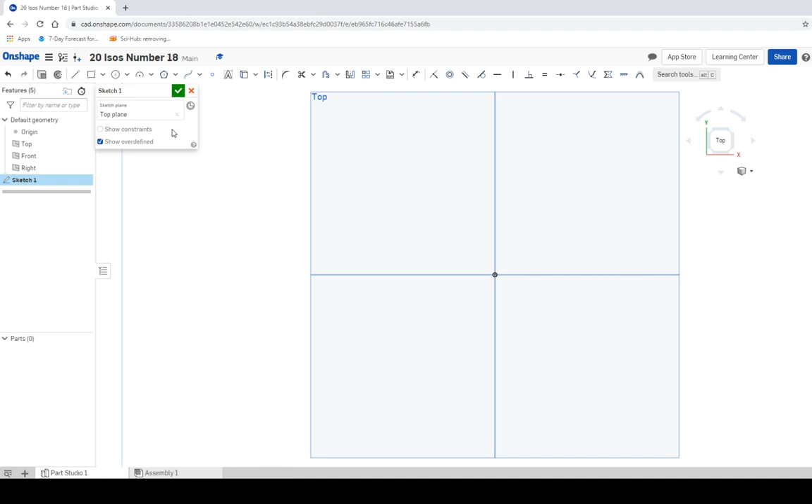So we're going to start a sketch. We're going to click on the top, and then we're going to make sure that we have the top view plane selected. We're going to create a rectangle. We're going to make that rectangle 8x5. So I'm going to type in 8, enter, 5, enter. And then we're going to click the green check mark, go to an isometric view.

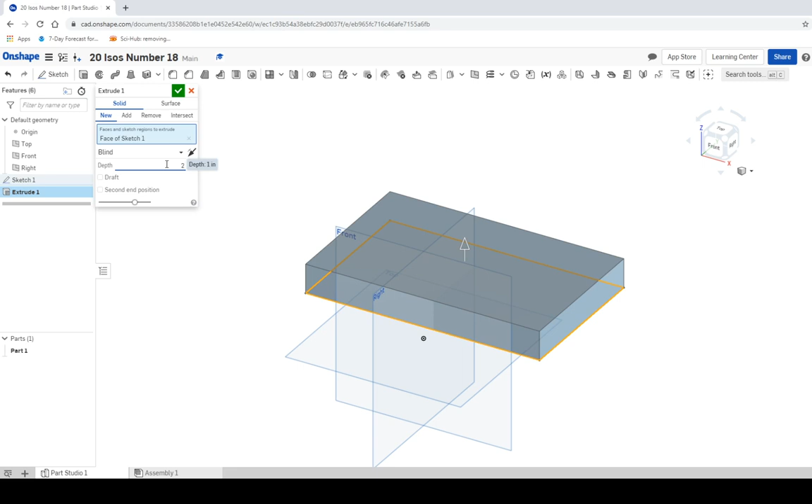Let's look at how much the base is going to be. That base is only going to be 2 units high. So when I go to extrude, I'm going to click extrude, and I'm going to make sure that it's set to 2 units, and then we're going to click the green checkbox.

Okay, we have a couple of things that we can do. So we could go ahead and start making the big block up top, or we can start making the cuts. My personal opinion is to go ahead and make the basic shape, and then you can start rounding off the shape from there and cutting out the shapes.

So I'm going to make this block that is a 2 by 1, 2, 3, 4, 5, 6, 7, 8, a 2 by 8, or 2 by 8 and then 8 high. So it's 2 by 8 by 8.

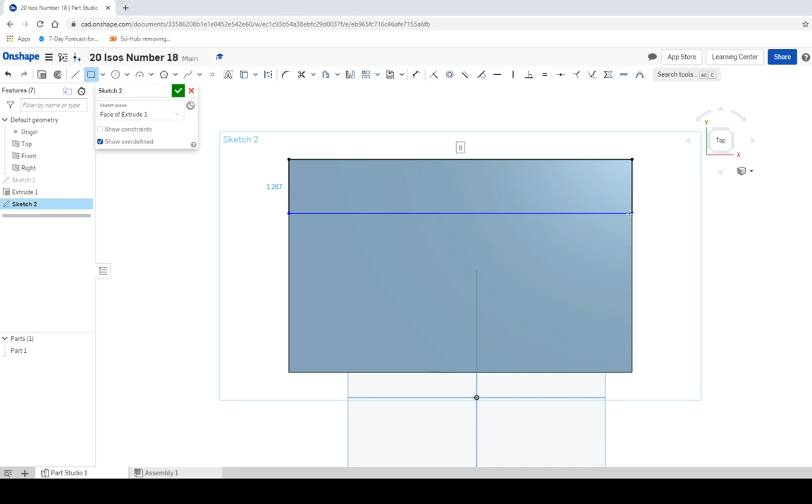And then let's make a sketch. We're going to go to the top view, make a rectangle, make that rectangle go out this far. Click. So that's 8 up top and 2 on the bottom. It's going to make some constraints for you, no big deal. Click on the green check mark, and then we're going to extrude that 8 units up.

Okay, we're going to extrude 8 units up to get our basic shape. Click the green check mark.

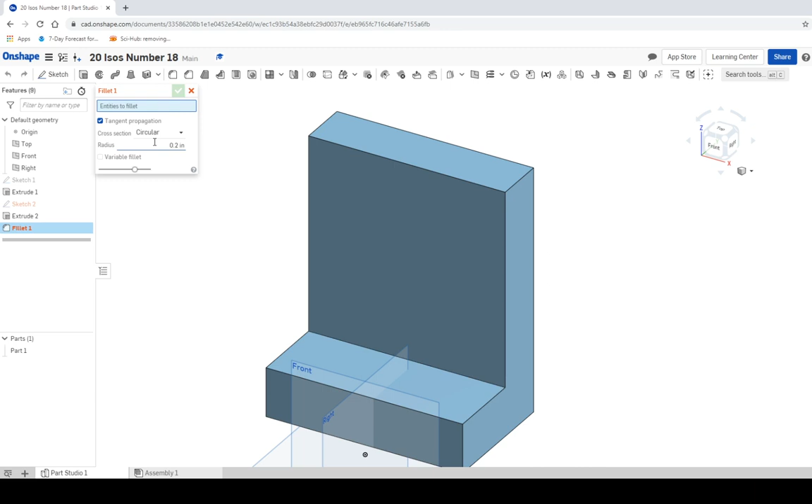From here, we're going to use the fillet command with a radius of 4 to round off this top part. Click the fillet button, set the radius to 4, then click on the left edge and the right edge to get a nice rounded shape. Click the green check mark. We are good to go on that part.

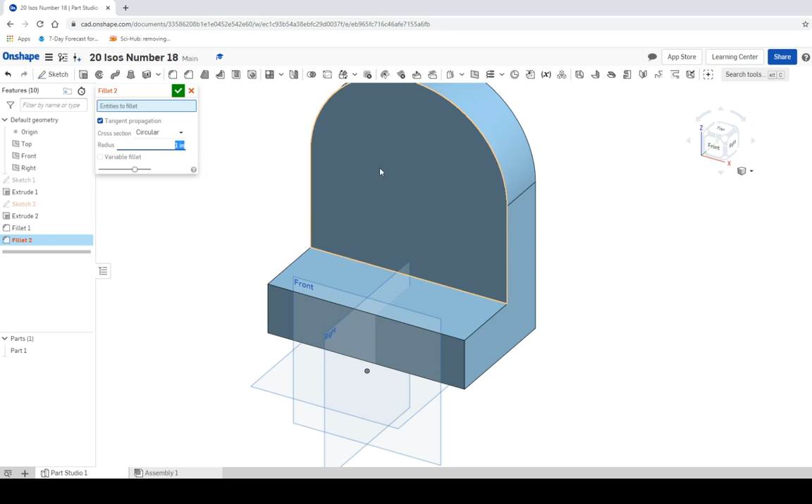The bottom fillet doesn't have a radius of 4, it only has a radius of 1. So let's use the fillet option again and set the radius to 1. Then we're going to click on the left... ooh, look what I did, hit X to cancel, abort mission. We're going to fillet, make sure it's set to 1, and make sure you actually click the edge, not the face, or try to do the whole thing. Click the edge on this side and the edge on this side, then click the green check mark.

Okay, so we now have our 2 fillets, and from here we need to do the rectangle cutout and the hole cut out in the middle. So let's do the rectangle next.

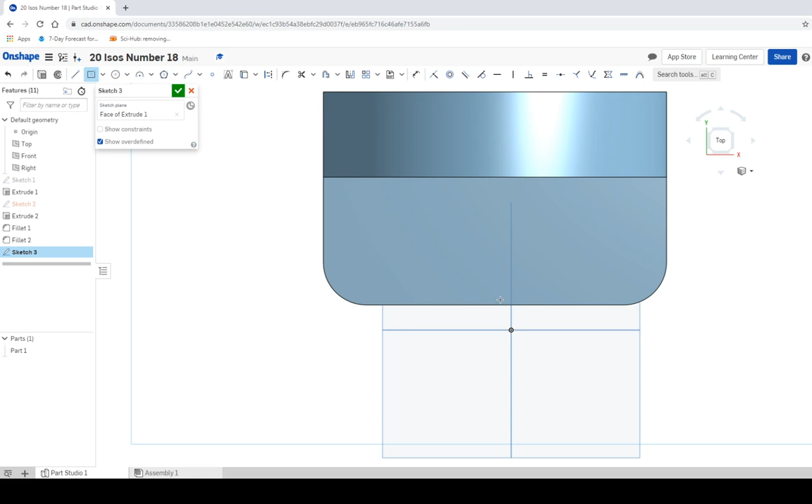Create a sketch on this flat plane on the bottom, then move to the top view. We're going to use the center point rectangle, which is the second option, not the first. Click center point rectangle, move your mouse to where it snaps in place in the middle, and then click out.

I believe we said we wanted this thing to go 4 units out and 1 unit in, but we probably need to double check. So I'm going to click once and go reference: 4 units across and 1 unit in, sorry. We're going to click 2 units for the height, because that's going to go 1 unit each way, and then 4 units across, which is going to be 4 units wide.

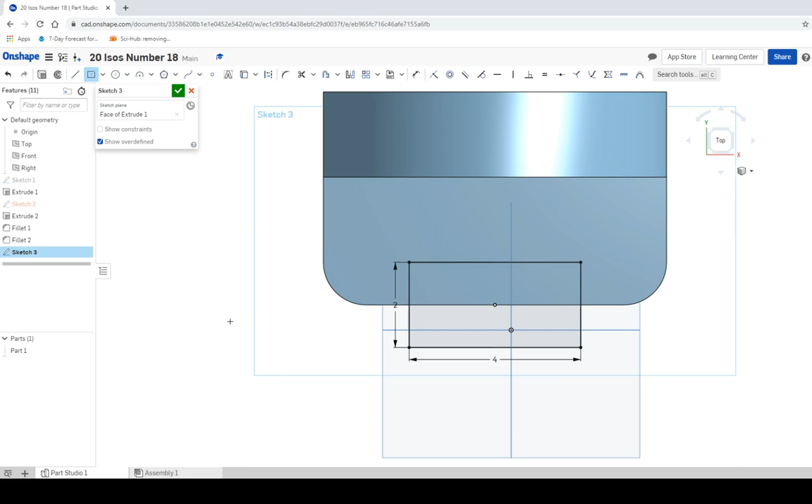Finish the sketch, and whenever we extrude, we'll be able to cut only the part that's over the sketch. So we're going to do extrude, make sure we select remove, click on the rectangular portion, drag that arrow down, and you should have a cut that goes completely through your object. Green checkbox to make sure we are where we need to be.

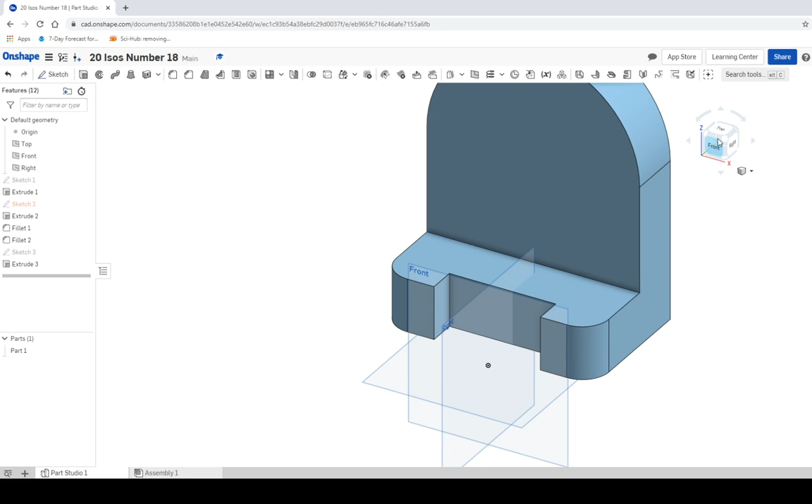Let's worry about this hole up at the top now. Create a sketch and put it on the flat surface on the front view. We're going to move to the front view, and to get the center of the circle, we move down 1, 2, 3, 4 units, and that center should be right at the edge of where the fillet is anyway. The center point of the fillet should be where we put our circle.

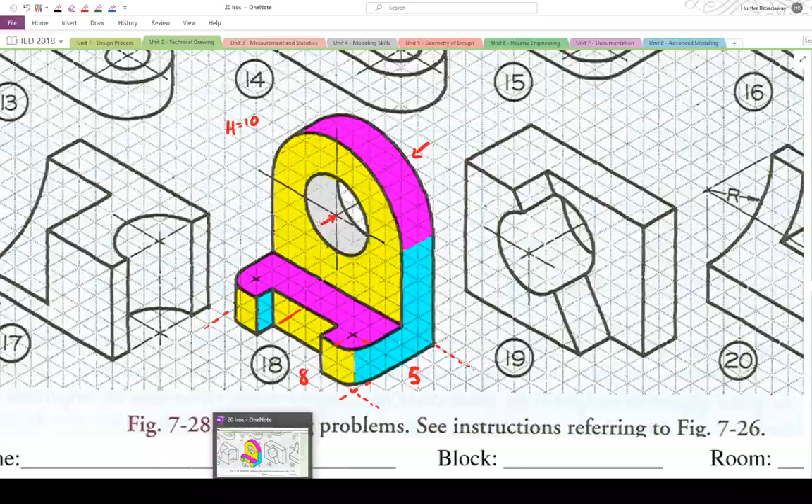So we're going to use the circle command, and we'll start at the top and just drag your mouse down to where it snaps in place. Right there, that's going to be the center. Click that, and we're going to have a diameter of 4 units. That's going to be our circle.

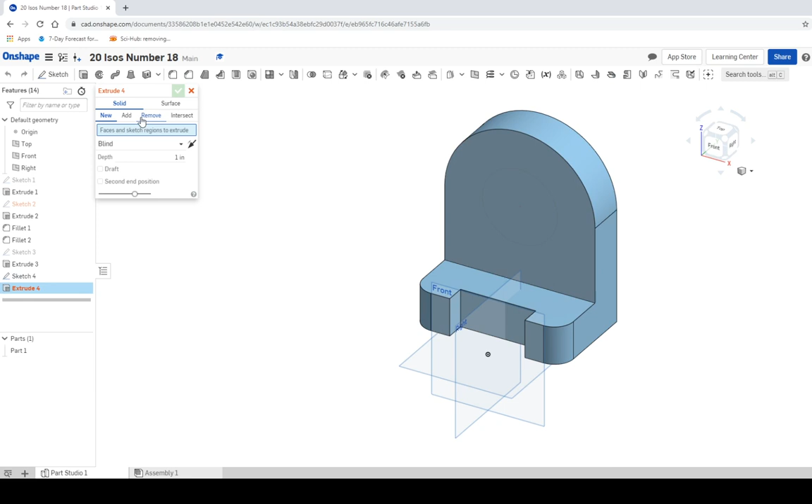Finish the sketch, go to the isometric view, hit extrude, select remove, click on the circle in the middle, drag that arrow out to get a hole in the middle, green checkbox. Let's double check and make sure we didn't miss anything: rectangular cut, fillet on the top, circle, 2 fillets on the side. Looks like we have this. This is going to be Isos number 18.